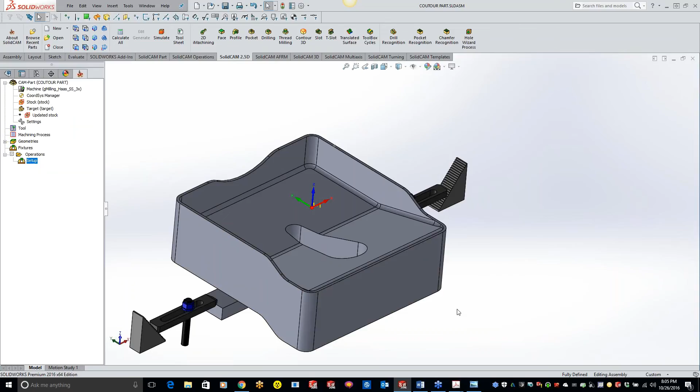A lot of advantages in here. For those of you guys that don't have a full 3D package, this would definitely help you out too, especially when we go to put a chamfer all the way around this top side. We really don't even need to use HSS.

We can just use the Contour 3D. So let's go ahead and mill the outside profile. What I'm going to do is just click on my Contour 3D. And like all of our SolidCAM operations, they're all going to look the same for you guys, so it shouldn't look any different than profile. But you'll see it's just doing, like I was saying before, a single profile line on a curved surface, which is what we're going for here.

So I'm going to grab my geometry like I normally do, and it's going to wrap it around for me.

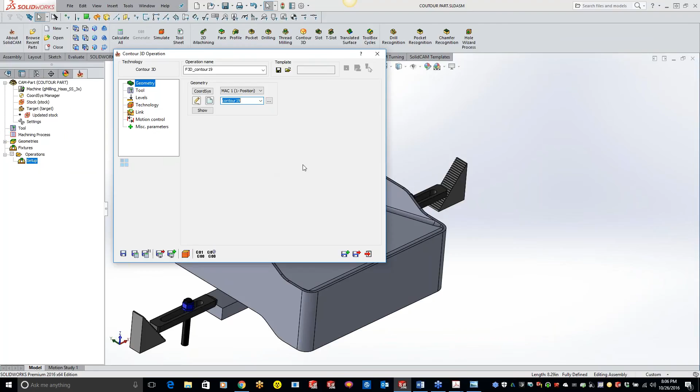Okay, so we got our geometry. Now let's go ahead and grab our tool.

I've got some tools already set up here, and we're going to use this big long cutter, a half-inch cutter here, and I already got my tool holder on there. I set my coolant, set my feed rate, all that stuff ahead of time for you guys.

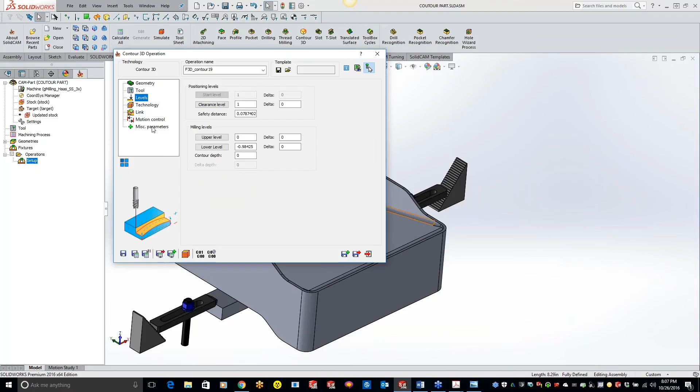So we got our tool in there. Levels - this is a page that you guys really won't have to worry about, except for when I'm doing the outside. And you'll notice when I grab the outside, I pick the top of my chain.

Right now, let me just turn my technology to left, and let's just do a save and calculate. You'll see right here, I'm just going right along the top, but I want to go all the way down to the bottom.

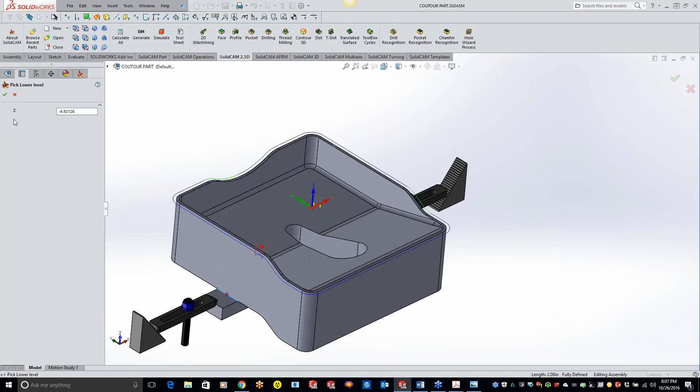So all we have to do for that is just come to your levels page and just click the depth, and we can just click on the line right there, and now it follows the depth. So now if I minimize this, you'll see that we went all the way down to the bottom.

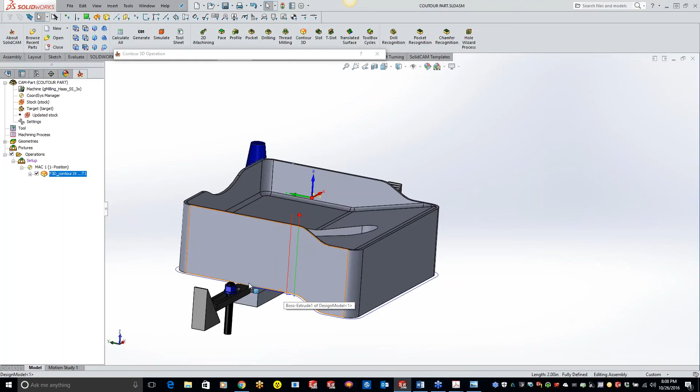Now, a couple things in here. One, I really don't want to be starting off right on an arc as the geometry is moving up right here. So what I'm going to do is actually kick that geometry over a little bit so we're starting on a nice flat surface. Real important - not so much on the profile, but when we get into actually doing a chamfer on here, you don't want to start with that chamfer on that angle, because we're starting off coming in there at an angle. We want to be on a flat surface.

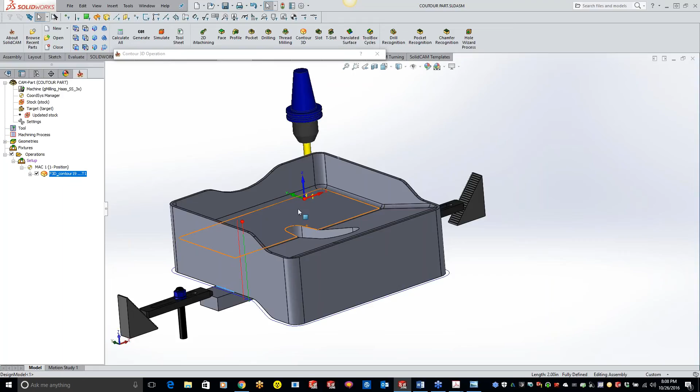And if you guys don't have a flat surface, totally fine - you'll just have maybe a small little witness mark there. But it's always best to try to start on something flat first. So we got our depths all set.

So now the technology - lots of stuff in here. And like I said in all of my other classes, technology is where all the goodies are. So what I'm going to do here is just do a step down of 200 thou. Because we have this long half-inch end mill, if we take that one cut, we're going to be snapping or getting some major chatter going on here.

But you'll notice if I switch this over to center, and I'll actually do this, you have a little bit more tool reference control going from tip to center.

Also, if you guys want to do a semi-finish, the tool does have to be on center for that.

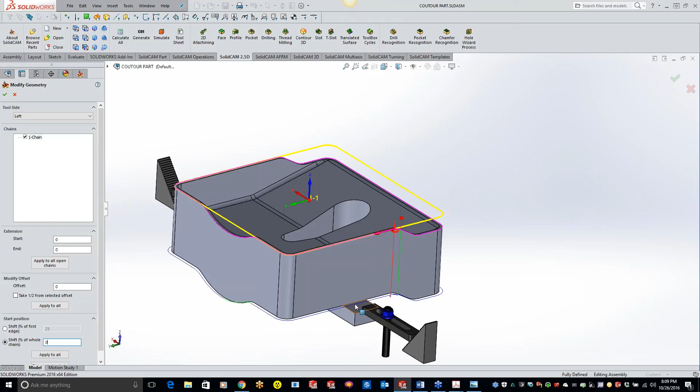Now, like I was saying before, I want to move that geometry so we're not starting right on the angle surface. I can just click on my geometry button, and this is going to be the same for profile too. If you're curious about moving your start point of your profile, it's the exact same thing. You can just do shift of 25%, or if you click with your cursor active in this field, you can basically click anywhere on the part and you'll see that it moved my tool path.

So my original was right here, and now it bumped it over to right here. I can click anywhere on the part and it's going to start it off there. So if you have an exact point, you can do a sketch point down there. We'll hit the green check mark and do a save and calculate.

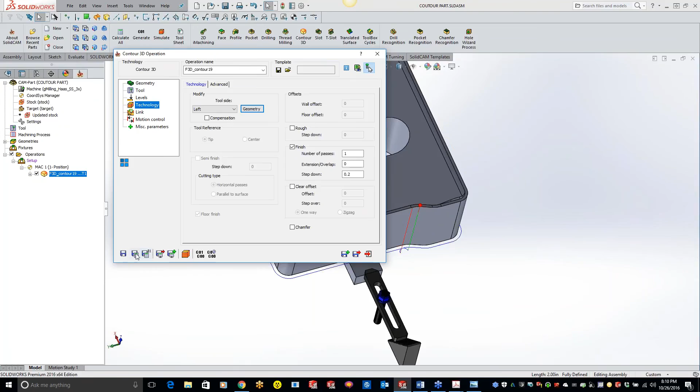Now you'll see that my contour follows the contour of the surface going all the way around. For something that comes up at the bottom, we're not wasting toolpath going around that, doing the straight lines. We're not cutting air up over here where there would be material if we did a standard profile operation. So let's just do a standard profile operation right here.

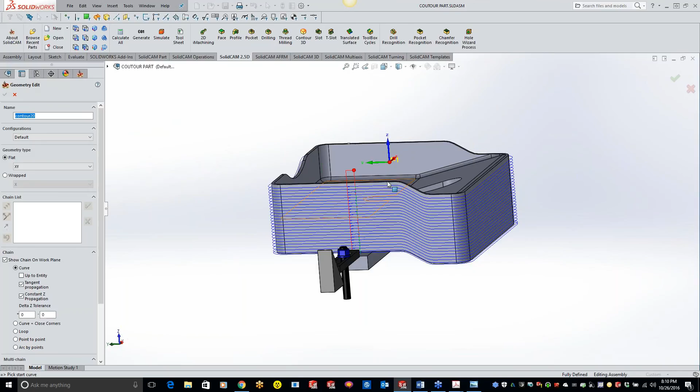And get that wrapped around. I'll just show you the difference between the two so you can really see what's going on here. With the green check mark, technology, we did 200 thou step downs, so we'll do 200 thou here.

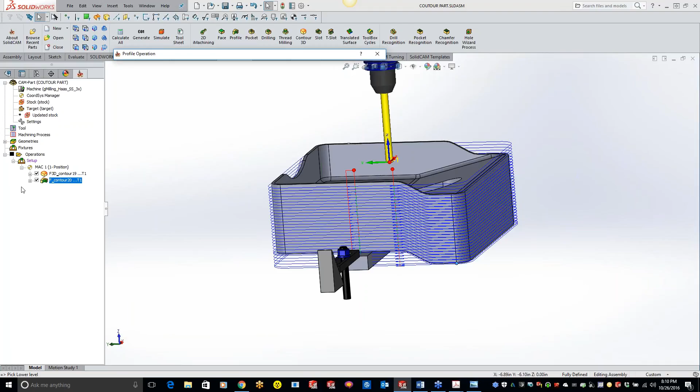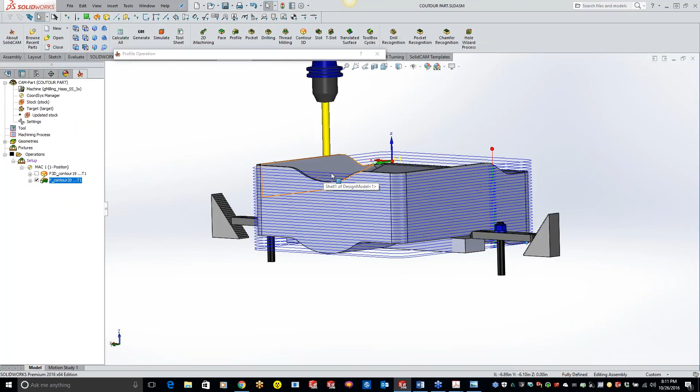Okay, so now here is our regular profile operation. We have a lot of air cutting right here, and then we also have a lot of air cutting down at the bottom here. Plus, obviously I don't want to mill off my block that's being held on by my toe clamps. And then also over here, we're going straight across, so we're machining air, and that's the whole objective -- not to machine air.

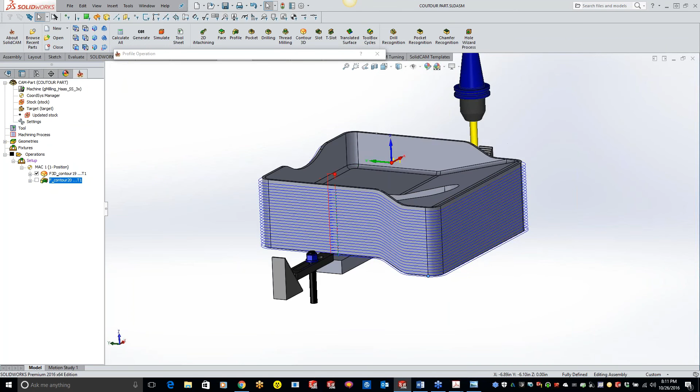So if I switch it over to contour 3D -- Ronnie Kidder had a question when you asked, wanted to know if rest of material would not cut air, but I think you just answered that. Yep. So that's where the 3D contour really comes into effect -- it's going to follow the geometry all the way around, follow the Z all the way around, and that way you're staying in contact with that part.

And give you a little bit -- we'll do a trim on the top, and I'll give you a better example of that. Oh shoot, I forgot to do one thing.

Terry, we forgot to probe our part to figure out where our part is. So let's just add a probe real quick, and we'll do a boss. Grab our same geometry here, grab our probe, and I'm going to do my X and Y. We'll do a show real quick.

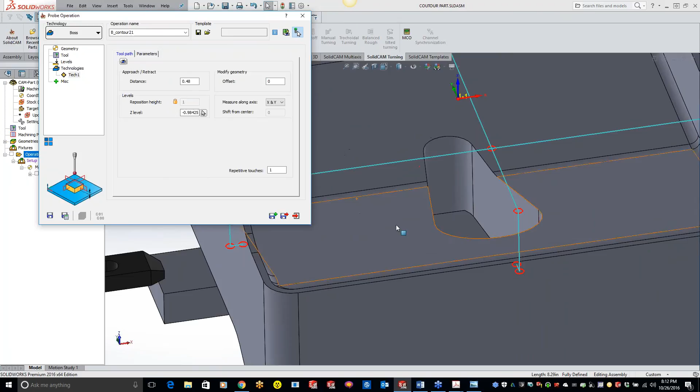And I just need to move my Z down just a little bit here. There we go. And do a save and copy and change this to a Z hit.

All right, so now we got our part probed, and I'm going to take and drag this contour 3D down. There we go. So now we probed our part, finding our X and Y -- and you can use this probe to measure stuff too. Probed our X and Y, found our center, and then we probed our Z there.

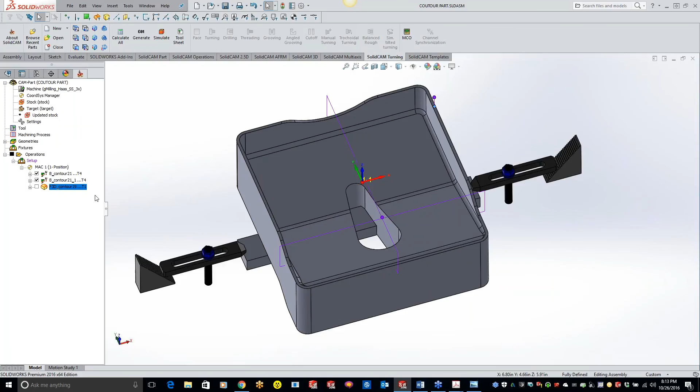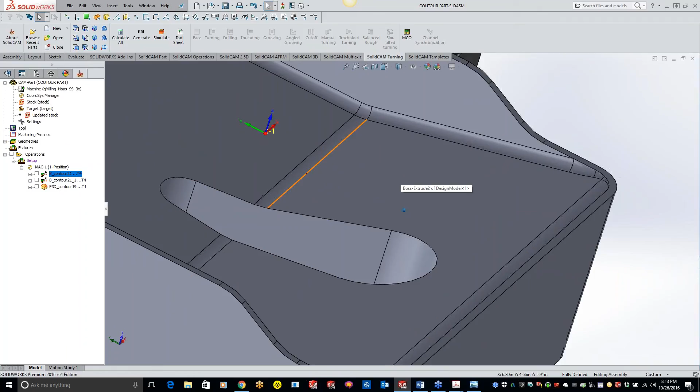Now I showed you a different way to use the contour on the outside. So now what I want to go over is this fillet inside here. Basically what I'm going to be doing is taking a ball end mill -- let me just pan this part around here. You can see this fillet follows up and tapers up to nothing right here. So what I'm going to do is grab that geometry, and it's automatically going to find it.

Now, for adding operations, there are two different ways of doing it. You can always right-click right here and add milling operations. Unfortunately, you'll find me doing this more often just because when I started using SolidCAM, that's the only way to do it. But now you can also have the shortcuts right up on top in your ribbon, so you can just click the contour 3D and do it that way. Okay, so my geometry -- I've already picked it, so I just got to find which one it is here.

Oops, going the wrong way. There we go. So just chain that bottom edge going all the way around right here.

Now I'm going to grab my tool. That is a 1/4 inch radius, so we can use a 1/2 inch ball end mill in there. And I got my tool holder, all that good stuff, already added there.

Now my levels, I'm not going to even worry about right here. Like I said, a lot of times you guys aren't going to have to touch the levels, just because it's solely based off of where that bottom geometry goes. So now in our technology, we're going to leave it on center.

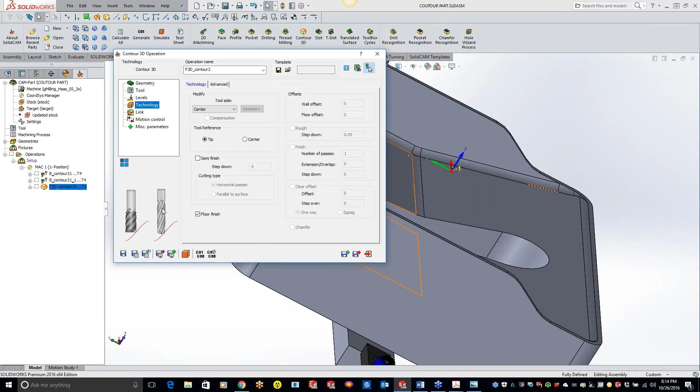Now I can do tip, and you'll see in the message right here, it's doing the calculation off of the tip of the cutter. So it doesn't matter if you're using a ball, a bull, or a straight flute end mill, it's always going to go off of the edge. But if I wanted to, I can switch it over to center, and it's going to go off the center.

Now you'll get some gouging going on right here, because on the flats it'll be fine, but as soon as we start going up a curvature, you'll see how that flat end mill starts digging in, or that ball end mill starts digging in right there.

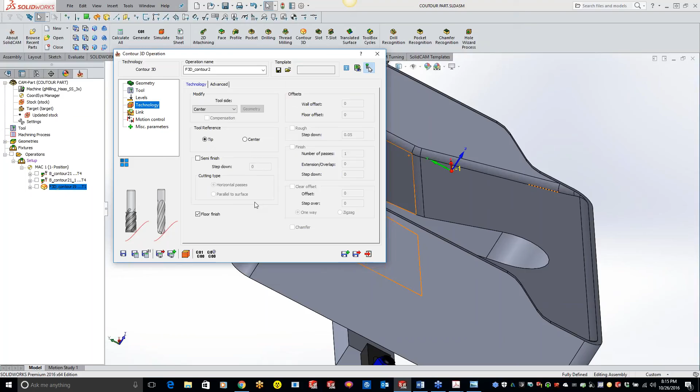So go back to tip and basically just do a save and calculate here. And you'll see we got a nice toolpath going in there. And let's go ahead and do a solid verify here. You guys can kind of see what's going on.

Well, you can see I'm shanking out here. I know I'm fine just because I got a reduce shank, and I actually didn't even put that in there, I forgot to. But another great feature inside SolidCAM is that full crash detection. Let me slow it down just a little bit here.

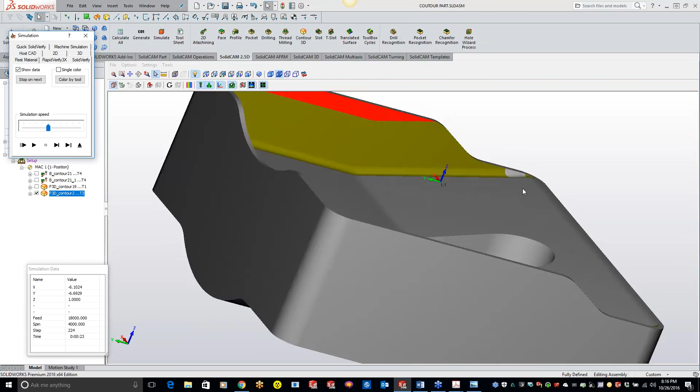So what it did is it followed that contour all the way around here. Now I don't have any stock on here, but if we get real close here, you can see it comes in, works its way around, and then let me zoom out here, and goes all the way through, following all the way along. So real nice, easy to use feature for you guys.

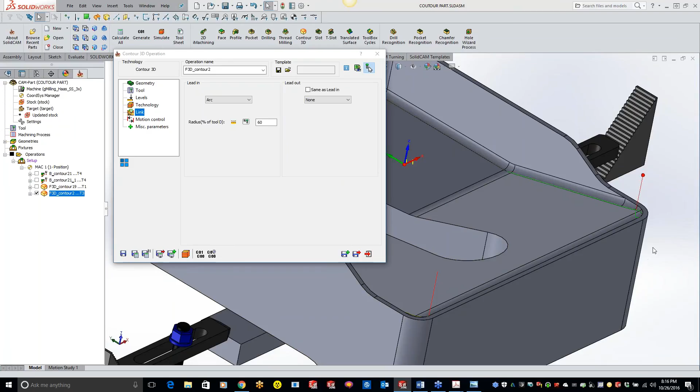One thing I do want to add in here is an arc in. So I can do a lead in, do a save and calculate. So you'll see that now I have a nice little tail coming up, coming down, arcing into the material, engaging, and then starts its tool path going all the way around. Really nice. You guys can have a tangent also, but I just like the arc because it's coming straight down from the material and slowly working its way in.

So any questions on so far from anybody?

Dang, we got a lot more people in here than I thought we would for having that baseball game going on. Well, the Cubs lead 4-0 now, so.

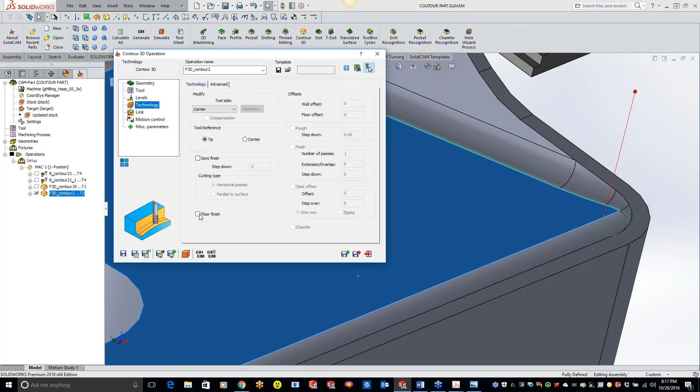Okay, so now one other thing I want to show you here is floor finish. You can check the box for floor finish. It's going to be automatically turned on when it's comp to center. You can uncheck it, and it's just basically going to finish up, letting you know it's going to be going right down to the bottom and doing that floor finish.

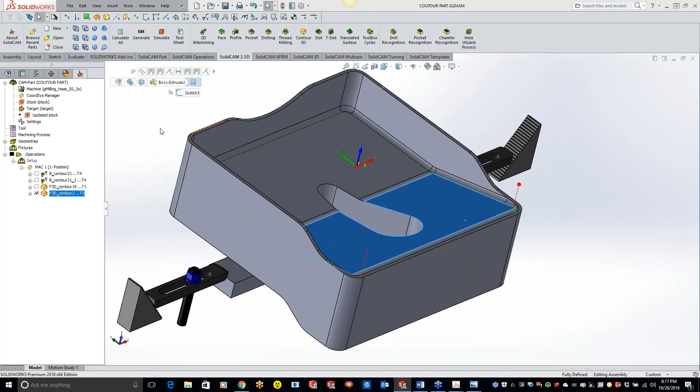Okay, so now what I want to do is trim the top side. Like I said, I don't have any stock built on here, but what I kind of want to do is show a representation of how that tool actually goes around using the geometry of the tip.

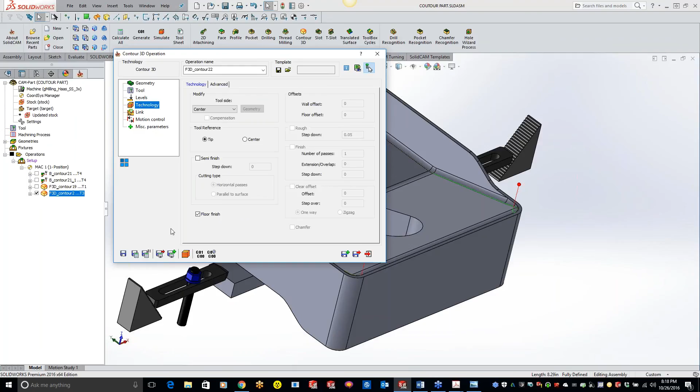So we will grab this chain, and we'll just grab a short 1/2 inch end mill. Now I'm not going to worry about the levels, and I'm going to keep the cutter right on center. We'll do a save and calculate, and you'll see it follows all the way through.

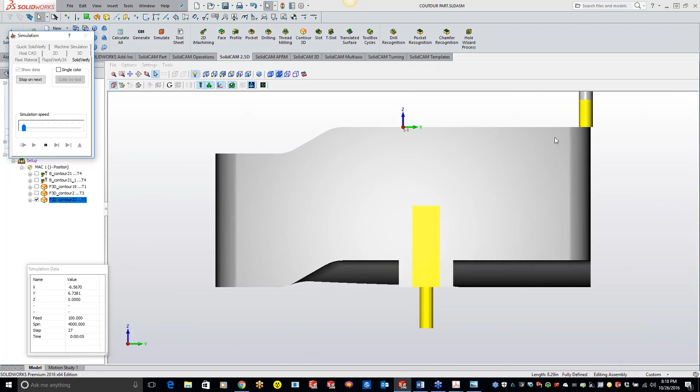Now let's just do a simulation here, and let's get a side view here. Slow it down. So you'll see the cutter going down. Let's see, that's on the back side.

It's going down in that dip in the front. And let me see if I can get a little bit better angle. Let's do machine sim. With that white backsplash, it's a little tough to see here.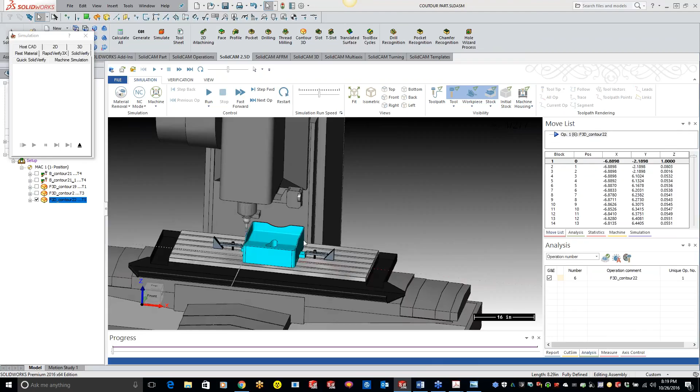Okay, so let's get in here and turn off our machine. Okay, so there we go. And we will get a side view. Right. Get zoomed in here for you guys.

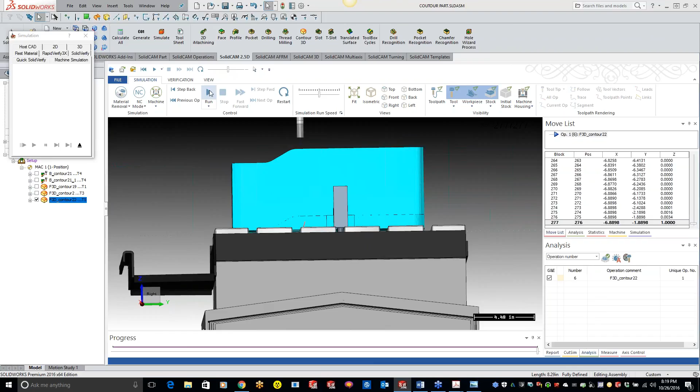If I'm going in too much detail, you guys can tell me to stop. Okay, so now I'll run this through. And we gotta go a little bit slower here. Okay, so now it's going down in the back, coming back up here.

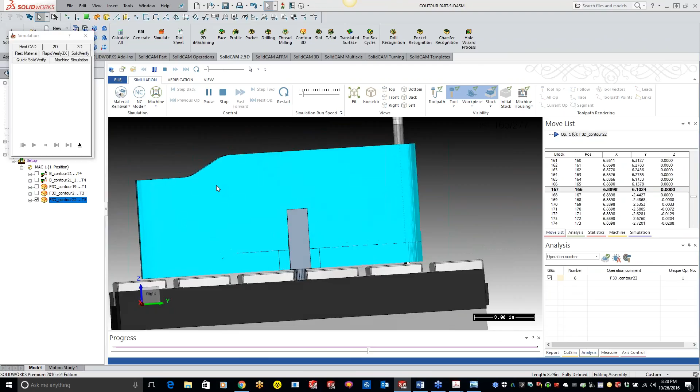And see how it's just working right on that tip? And then gets down to the flat surface.

And it works its way around. Now, I can also change the start point of this too. So if you want to move it around, you can definitely move it around at a different start point.

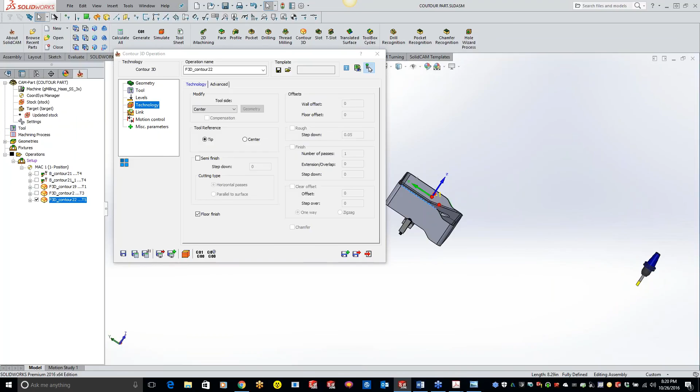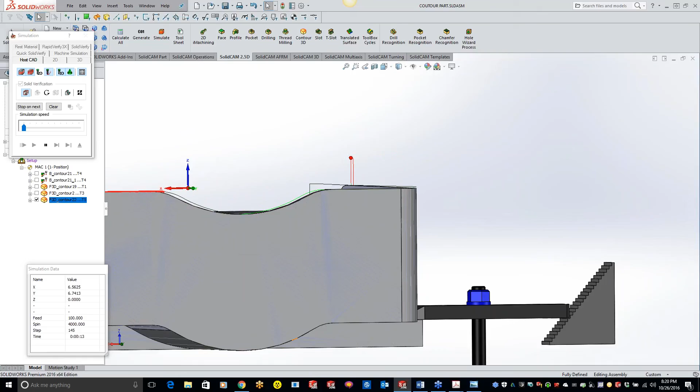Let's see, I'm trying to think of anything else I'm missing here. I think that about covers it. If we want to do a host CAD with 3D, it gives a little bit better representation of what's going on there. So it actually switches, and you'll see the tool path in the green come down to the flat and then raise up again, so it's compensating for that tool diameter of that cutter.

So any questions, concerns, anything so far?

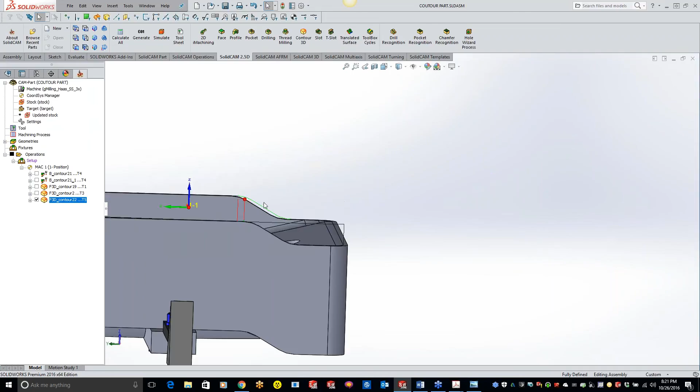All right, doesn't look like it. Hopefully we're not putting anybody to sleep yet, Terry.

Okay, so now what we are going to do is chamfer the top. Basically, I don't even have to draw anything in there. What I can do is actually just do a save and copy off this operation and change out my cutter here to a spot drill or a chamfer drill.

Now, what I'm going to do is switch this off to left, and we're going to do a finish pass. Now, the thing with the chamfer is we don't have very many options right here, but down at the bottom right you'll see we have a chamfer option. So in here, as soon as I hit that checkbox, you'll automatically see this chamfer tab pop up right here.

If I uncheck it, check it, you can kind of see it popping up right here. So it's asking what cutting diameter, same thing as what we kind of talked about last week in profile of the diameter size. So I'm just going to use 100th of the tip diameter that I want to use, just doing one finish pass right here, and we turn on cutter comp here.

And now we go to our levels. I can just type in, I want to go 20 thou farther down to get a 20 thou chamfer. Save and calculate here, and we'll see we get our toolpath.

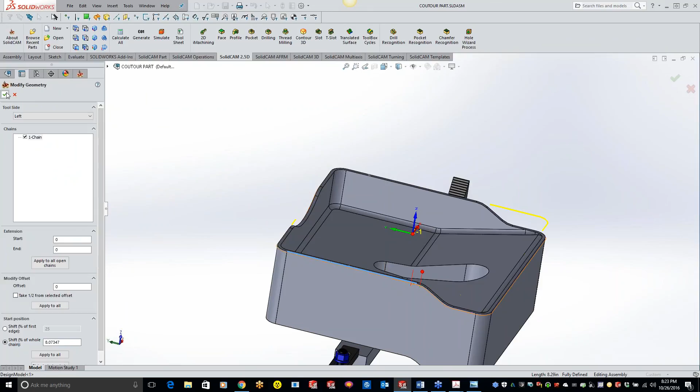Now, I want to move that because, like I said before, we don't want to start on a curved surface, we want to start on a flat. So let's go to our geometry, and let's just shift our start point so it starts right here, on a nice flat surface. Like I said, it doesn't have to be, but you might get a little tiny witness mark there just when it's starting on an angled surface.

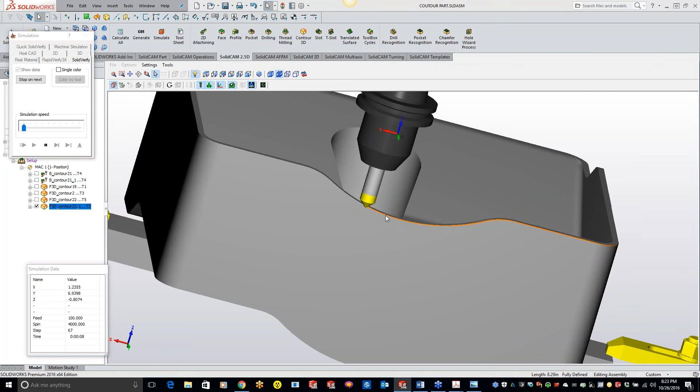Okay, so let's see what this guy looks like. So we're getting that nice chamfer all the way around the entire edge of our part here.

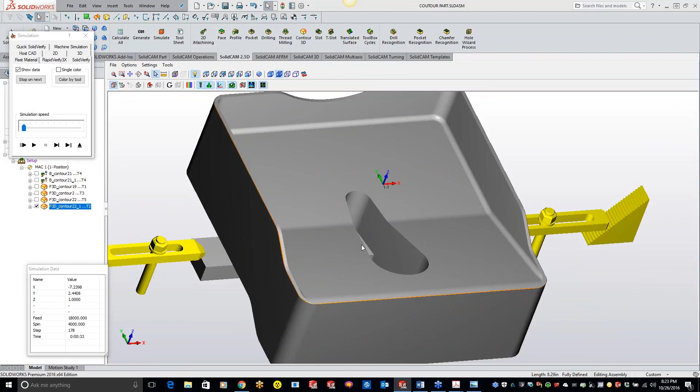Easy as that, guys. And like I said, it's basically the same thing as doing a chamfer on a standard profile. Same guidelines, same thing set up in the chamfer option right here. Now, if you guys want, you can add different arc in, arc out.

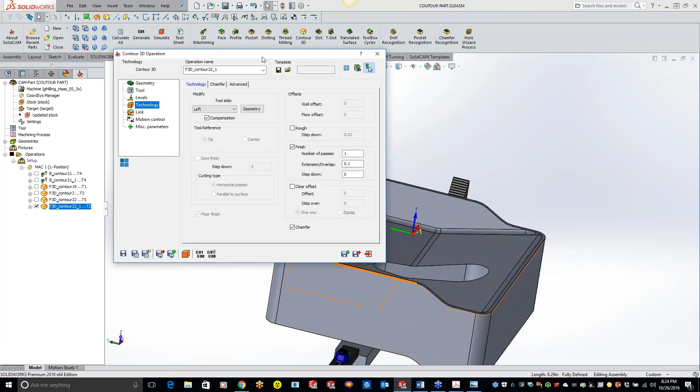In the technology, if we want to do a little bit of an overlap, so we're not starting and stopping on the exact point, let's just do a 100 thou overlap. And you'll see that overlap is actually the distance right here, so it's just the distance that it's overlapping going back and forth. So if we wanted something much greater, we could do, oops, not 3 inches, do 0.3.

Save and calculate, and you'll see how that increased as I made that bigger. So, also a nice feature: if you're trying to get a nice clean part and don't want a little witness mark from starting and stopping at the exact point, this is a great spot to add that in there.

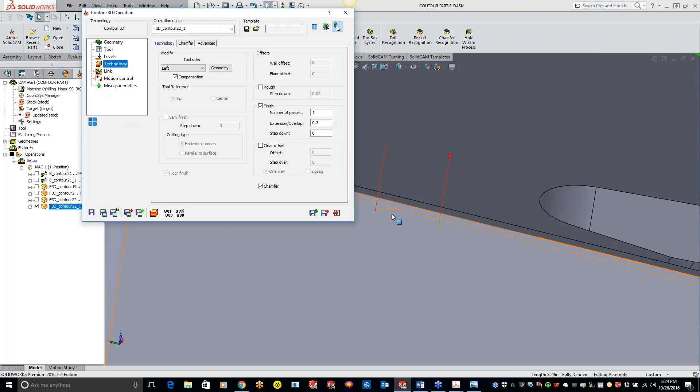Now, if you guys want to do step downs, you can definitely do that with your chamfer tool or any of the tools in there. Same thing with the clear offset.

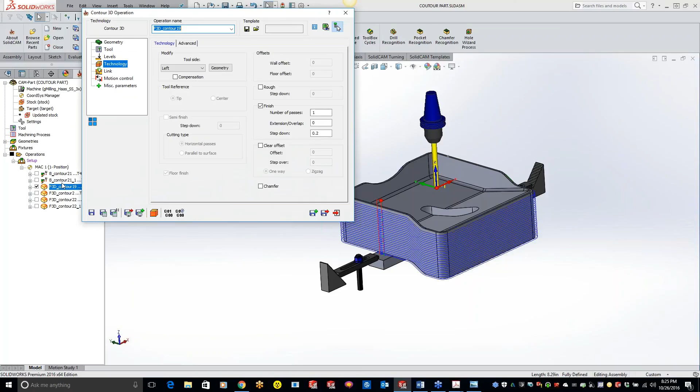If we go back to our outside contour here, and maybe we had some more stock material in there, we can do a clear offset. So let's just do, I'm trying to think here, what is the distance from right here to right here?

It's not going to let me do it with the operation open. Let's go to evaluate real quick, tape measure from there to there. So if we can make it, we can make a 1 inch fit in there.

So if we want, we can do our clear offset, do 1 inch, and we can do step overs of 100 thou.

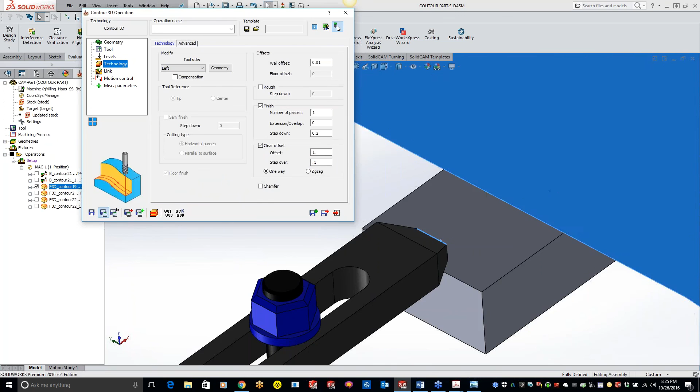Now we're going in there, doing our clear offsets. So another great feature. Now we're only doing step overs on our finish, so we're not actually going down. If we wanted to go down, you'd want to add your 0.2 in here also as your roughing.

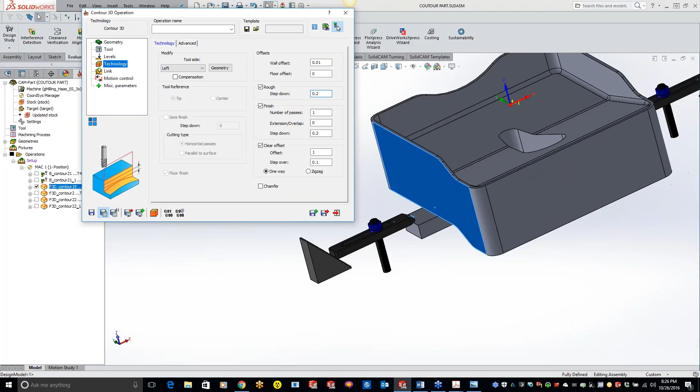And now we've got all our tool path going around. So if we had to rough this out, go to SolidVerify. It's taken multiple passes to get some of that material out of there for you guys.

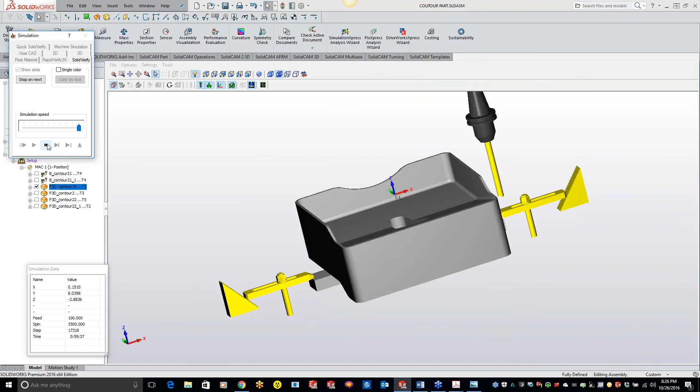Kevin, did you see the question? If you were to do a profile on the inside of the wall, like you did on the outside, with a step down, would it generate a lot of air cutting, or only cut where material is? No, great question. Let's stop this, and I'm going to turn off that clear offset here.

Okay, so now let's go to our inside. A little trick too, if you guys are trying to figure out what toolpath did what, you've got the little check boxes over here and you can kind of see what's going on.

Also, I should be showing you guys this too. You can name these. So you can come in here and say inside chamfer, or whatever you guys want. You can add that in there and we'll change it. Or if you're in the operation, you can just type it in up here as you're doing the operation.

So to answer your question, what we want to do is a semi-finish, and we're going to do a step down of let's just do 100 thou. Now you can do horizontal passes, or parallel to the surface. If I do parallel to the surface, it's going to follow the contour going down.

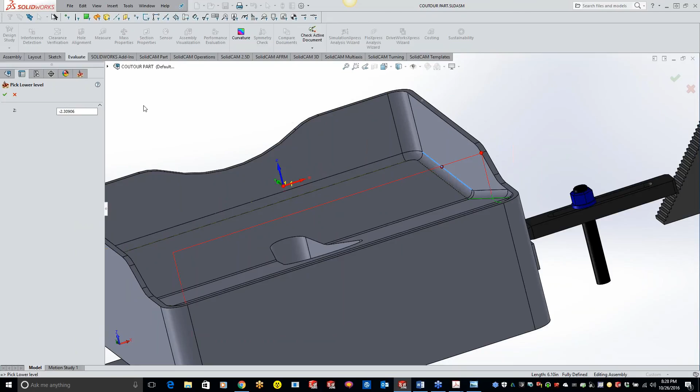So what I need to do is, on my levels, my upper level will be right here, and my lower level... trying to remember how we got to do this here. I need it to step down, contour depth. There's a way to step it down. What am I missing here?

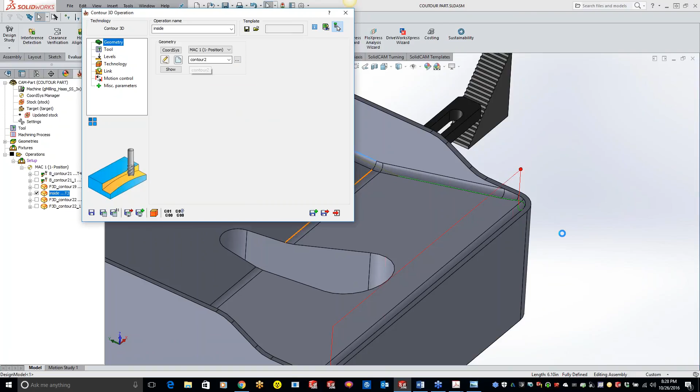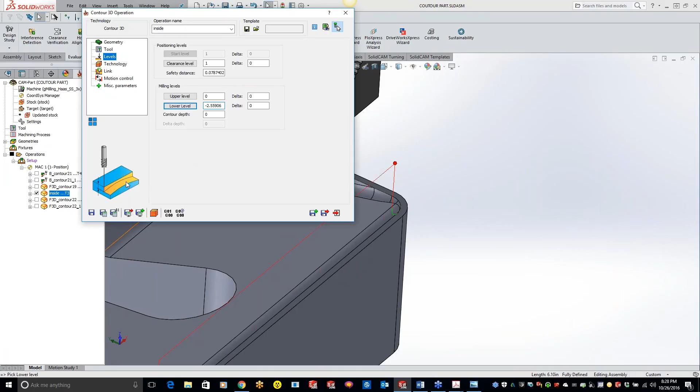So what I'm going to do is grab the geometry right here, and let's do an edit real quick, undo right there, green check mark. Now we'll stay on center and levels. Okay, that looks good. And contour depth. Sorry guys, I'm just trying to figure this out here. 2.57.

Okay, so now I think I got this right. Let's simulate this, do a solid verify, slow it down for you guys here. So now we're still cutting, no air. Oh, I got my tool on the wrong side here. But you'll see we're not wasting any passes here. Let's go to Host CAD. We're not wasting any passes, it's just going through and following the contour of that surface.

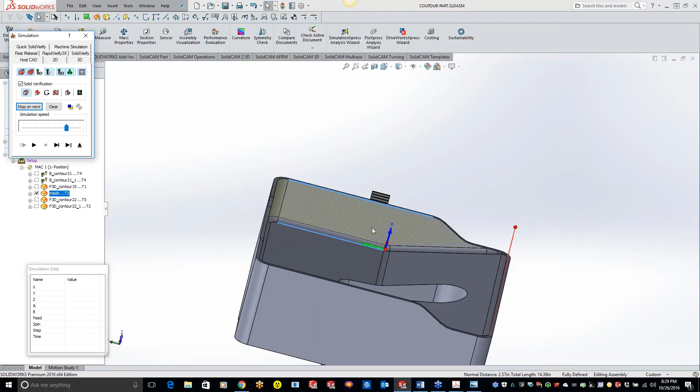So hopefully, George, that kind of makes sense for you. It's following the top contour line as it's going around. So if you guys wanted to rough it down to this point, that's the way you're going to rough it down, going to this area right here, following that contour all the way around. There should be a way to... thank you for the question, George. Yeah, absolutely, there should be a way to do it by using our other geometry here.

Let's start here. And that looks good. And let's do... if we do left, well, let's just try it. And we'll do a rough, actually we'll do a finish, step down of 100 thou. And it's not liking something here, levels, depth.

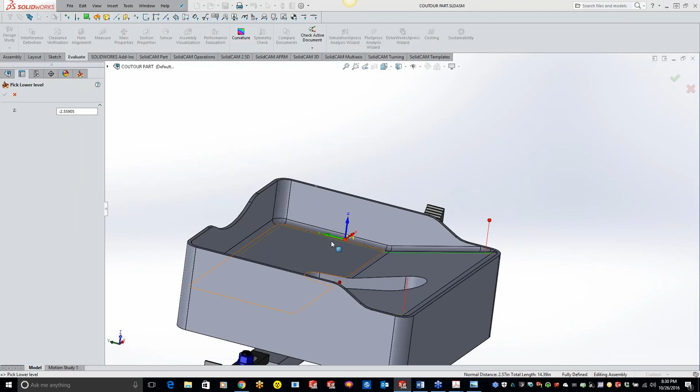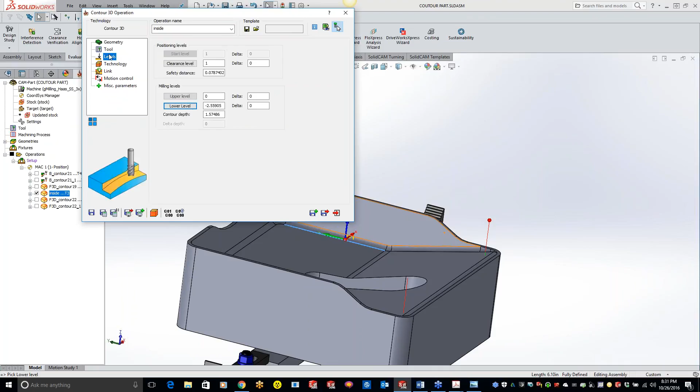Yeah, George, I'll have to look into it so it follows the bottom contour instead of the top contour. I just got to figure out what I need to do to switch it around here. If I go to my technology, keep it on center, it allows me to do my semi-finish, but then it's not stepping down like I want it to here. So let's just put that at 0. So that's how we were before.

Oh, because I have floor finish turned on. No. Yeah, there is a way to do it, George, I'll have to look into that and get back to you on that one to get it to step down. Just right at the moment, I can't think offhand what I'm missing here to get that to follow. So it just eliminates all the cuts over here, so we start gradually getting more and more cuts as it gets thicker in the surface right here.

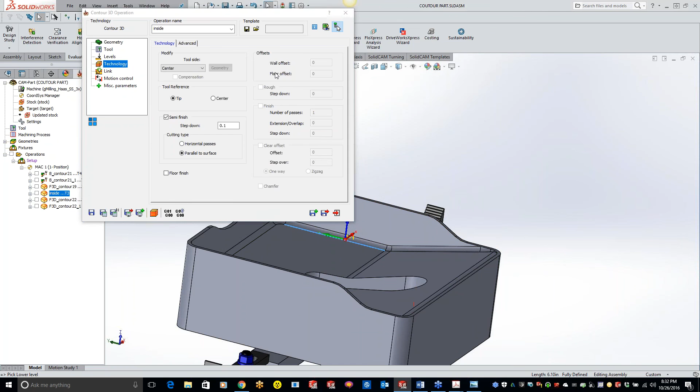Okay, so the last thing I want to show is basically another chamfer of what's going on in the center here, just doing basically an edge break for what we're doing here. So what I'm going to do is open up my last chamfer operation and just do a save and copy. All I have to really do is change around the geometry here.

So if I pick new geometry, it wraps my geometry around, the tool is going to stay the same, levels are all going to stay the same. I can basically just do save and calculate. Now once again, let me just do a simulate here, and I can show you guys that little witness mark that I'm talking about.

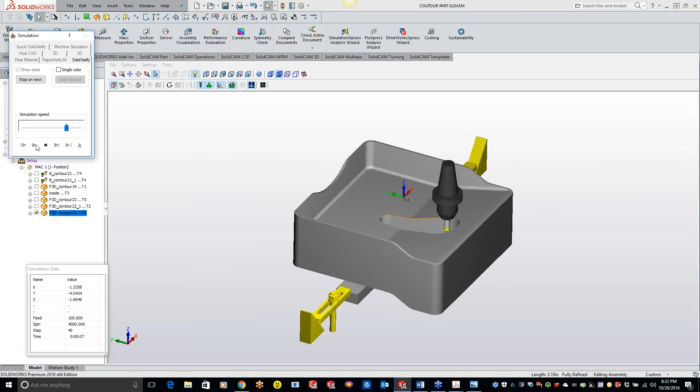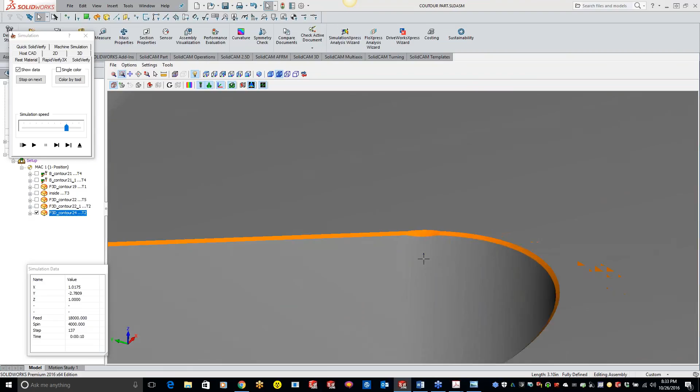Okay, so if I zoom way in here, you'll see it. I get a little bit of a thicker spot right here because I was starting on that 3D surface. Now, I have my tolerance set extremely tight to show absolutely every little detail, so we're in the millionths when I'm in my settings here for my verification. But like I said, try to start out on that flat surface as much as possible to eliminate that.

So what we'll do to get rid of that right now is go to our geometry, click on the field, and start at a nice flat spot. Save and calculate, and let's do a simulate here.

And now we get nice and even. We don't see any deeper spots or shallower spots all the way through because we're starting on that flat surface. Like I said, when you guys run on your machine, it might be something you don't even see if you just have an angled surface. But I am zooming in pretty far when we did see that witness mark there.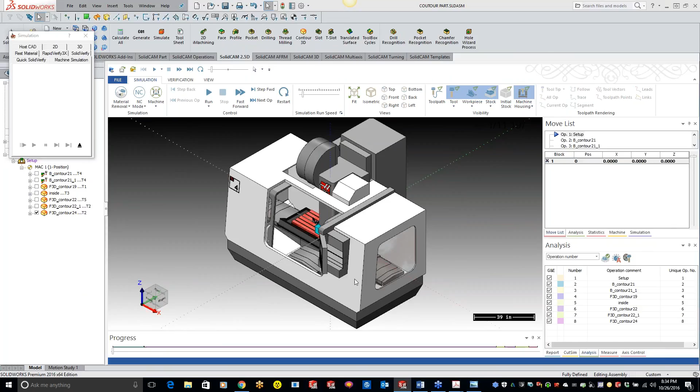So let's go ahead and start from the top and go to my simulation here. Let's do machine sim. Now, if you guys don't have this machine sim, it's really kind of cool here. You can see I have all the doors on there, control panel, everything in there for you guys. So let's just play this through slow here.

The machine sim comes with the 5-axis Pro, and typically we don't see it too much with just the 3-axis, but in the 5-axis you do. You can get that as an add-on. It's $800, but you have to supply us with the model, unless in some cases we already have quite a few machines modeled up. If we've got it, we'll give it to you. I know, like the Haas 750, I had about 6 customers in one week come to us.

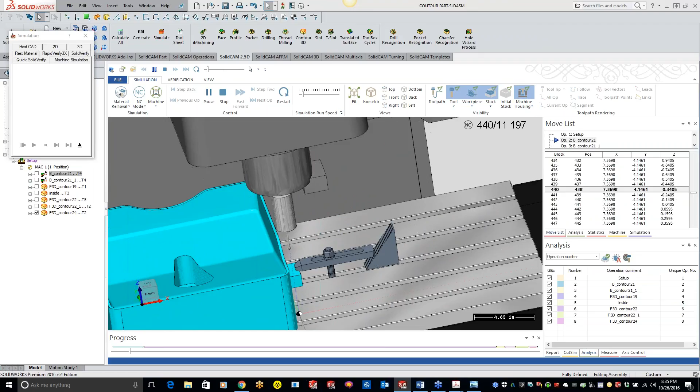With the post and the machine sim, it's a little bit of money, but if you figure that this is exactly what you're going to see in the machine, you got the full head, full crash detection of what's going on here. You crash that spindle one time or take out a holder, there's your money right there. So it's real nice to be able to see and go through here as it's playing through.

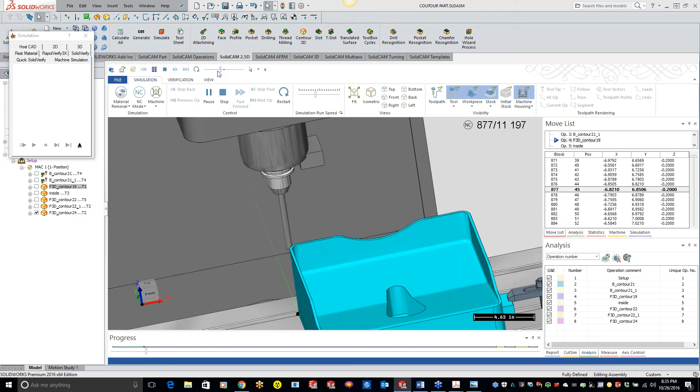Let me speed it up just a little bit as we're probing here. And when we're probing, it's automatically writing back to the G54 for us, rewriting the code. So now we're doing our Y hit, our Z hit, now we're doing our profile going all the way around here. I can speed it up a little bit.

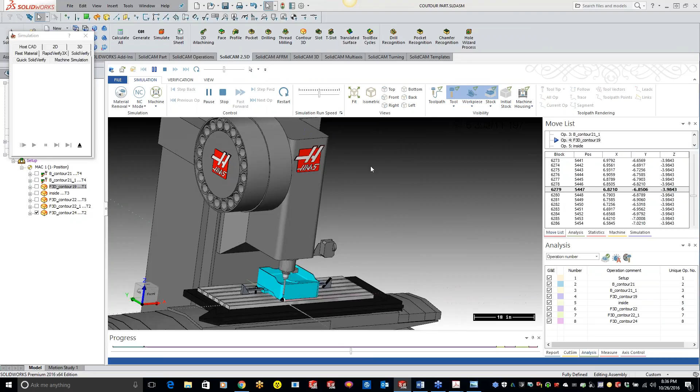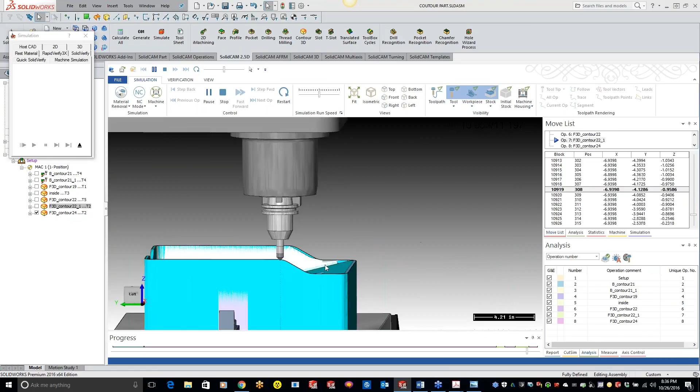Let me just turn off the machine housing here and do a front view. You can see the whole head is actually moving up and down too, which is really cool. So let's do a left view. You'll see I get pretty close with that tool holder coming in there. Doing our chamfer. And that's it.

Will it simulate macros? Are they built-in macros in SolidCAM that you've had added in there from the post, Clarence, or is it, what kind of macros are you talking about?

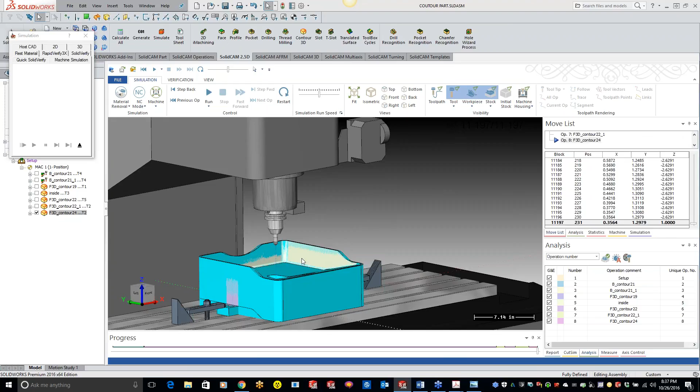No. Hand-coded. I've actually never tried a hand-code file in there. I would assume it would, because it's going to be posting out and it's going to all come together for you. So I would assume that your macros would be included in there. We might just have to do some post tweaking to make sure that when you go to run your hand code or your macros in there, the machine sim is going to show that. So, definitely can be added.

Any other questions, guys? That pretty much wraps up. Let's see, may I ask, Kevin, we had another question from Clarence. We are looking at sim software.

Yeah, definitely. Clarence, if you've been working with Eric on the post, ask him about that, and he'll be able to find that out for you with the machine sim, because the machine sim is basically off of the post files for you guys. With machine sim, it's reading those GPP files that they've sent. So, definitely something we can add in there, because that's part of the cost, adding the post or the machine sim to the post. And it takes a little bit of time. If you guys look at this machine, there's lots of detail in here, making sure all my table ways move in the correct directions, moving stuff up and down. So all that has to correlate with the post processor and the G code.

Kevin, did you see George had a question? All right, George, could this function, 3D contour, be used with either a lollipop or a dovetail cutter? I'm putting a chamfer on the underside of an irregular surface edge.

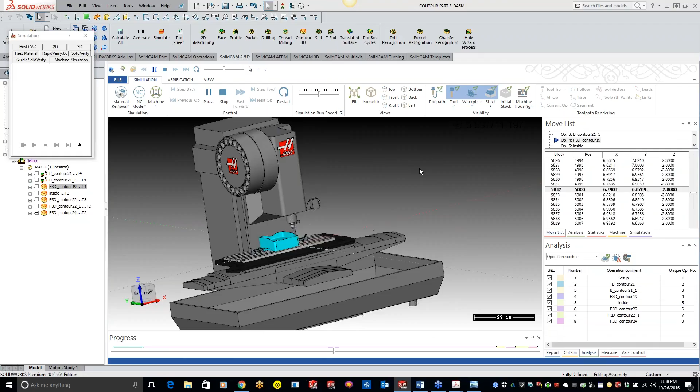I guess I've never used lollipop in here, so let's just do a contour. The best way to tell is to come in here and try to grab a tool and add one. So it does support a lollipop cutter and the slot mill or dovetail cutter. So absolutely, you can put your geometry, like if you're doing the bottom side here, you'll just pick that bottom side of the geometry right there using that dovetail cutter or your lollipop.

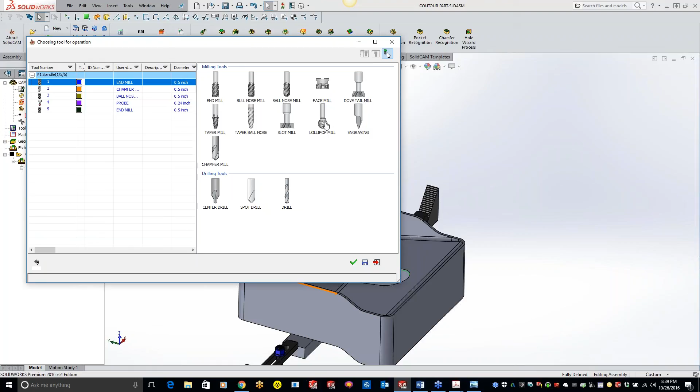You might have to play around with the levels, since the lollipop is a full sphere, using the plus or minus in your delta to make sure you're not taking too much or taking what you want. But absolutely, you can do that.

The best thing I can recommend for doing undercuts and stuff like that would be HSS, but you can definitely do it with the Contour 3D. With HSS you're going to have way more control over your tool path. But if you guys don't have HSS, definitely use the 3D contours. It's just going to take a little bit more playing around to get it to follow along, based off the depth.

You might also have to play with shifting your chamfer tab of your cutting diameter in one direction or another, to get more of a chamfer or less of a chamfer on there. So hopefully that answers your question, George.

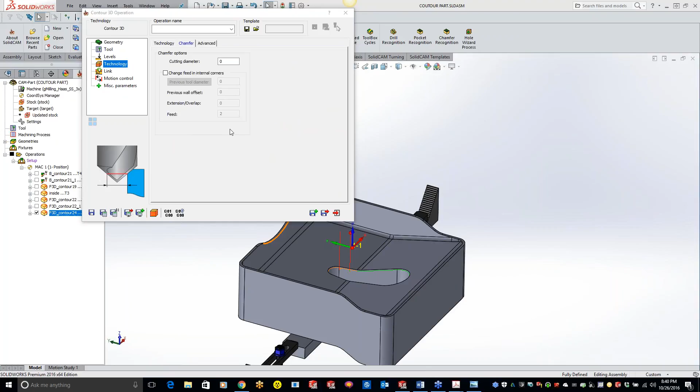Do we have any other questions, guys? I don't have anything more to show you, but there's not much more in 3D contour that I could come up with. With the night classes, I'm going to be going through everything, since I've had a lot of requests from people wanting to see everything. So I'm just starting at the top, working my way down through the list. Next week we'll be going over pocketing, which is going to be a big one.

If you guys have any questions, now is the time to ask.